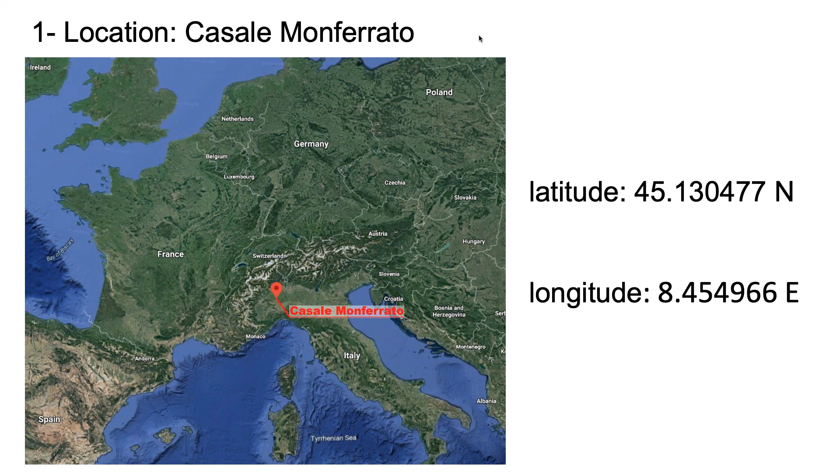Let's start with some information regarding the location of this artifact. The building is located in a region in the north of Italy, more precisely in Piedmont. This area is located between Milan and Turin, two of the main Italian industrial poles since the first decades of the 20th century. This region was a very important area for Italian economic development, as many important industries developed in this zone.

The structure belongs to the municipality of Casale Monferrato. More precisely, it is located in its industrial area, on the south of the city, near the railway station, as you can see from the area zoom.

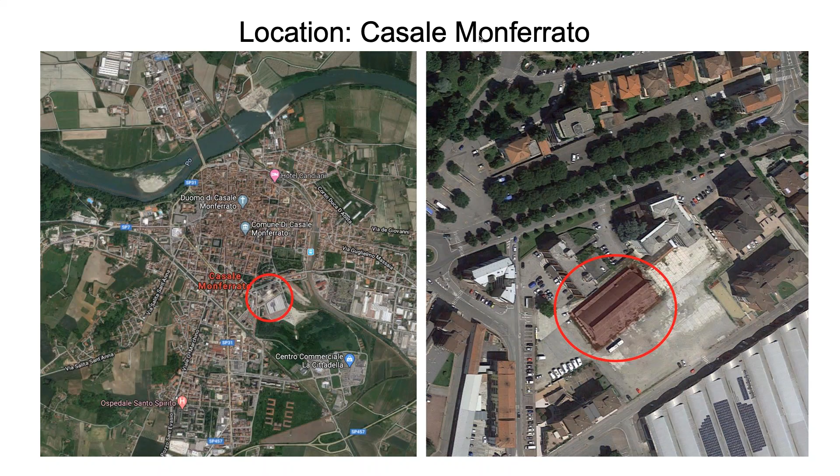The structure is commonly called the paraboloid. It was built at the beginning of the 20s by the Italcementi company of Bergamo as a warehouse storage for industrial material, clinker. It is located in the southern part of the city of Casale.

After the end of Italcementi's activity, during the following years, most of the structures were demolished, with the exception of the paraboloid, which was used as a timber warehouse from the 50s onwards. It's unclear if the central pillar and internal beam were added in this period, or if the chains were pre-existing. Their purpose was to counteract the internal thrust of the arc and act as a support base for a raised storage level added to the structure.

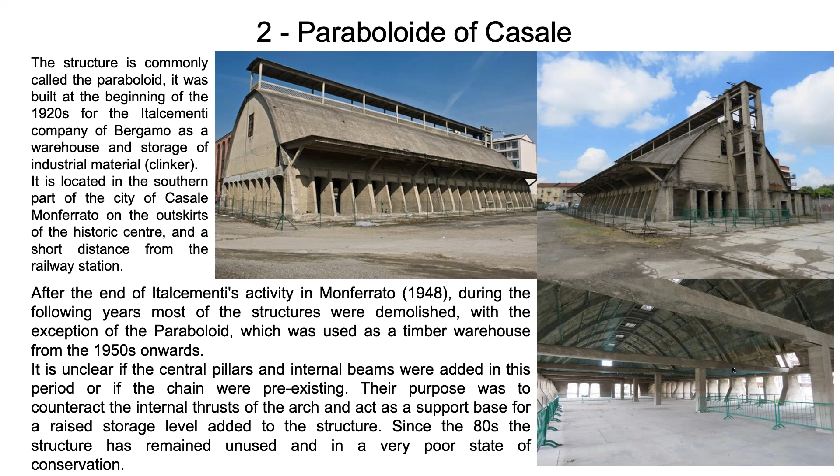Since the 80s, the structure has remained out of use and in a very poor state of conservation. The paraboloid is considered a reference icon of the industrial past of Casale, being in fact one of the first buildings in reinforced concrete made with this particular shape.

On the side, there are some scans. These two scans are the only technical documents we have found about the paraboloid of Casale. They were recovered from the book Reinforced Concrete in Civil and Industrial Building by Luigi Santarella.

Being a structure of historical and artistic interest protected by the Cultural Heritage and Landscape Code, in the last decade it has been the object of analysis aimed at the architectural conservation of the asset and the requalification of the neighborhood.

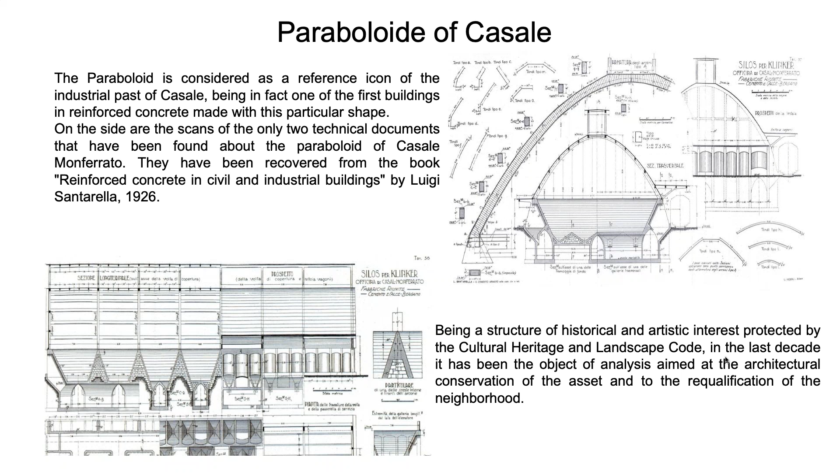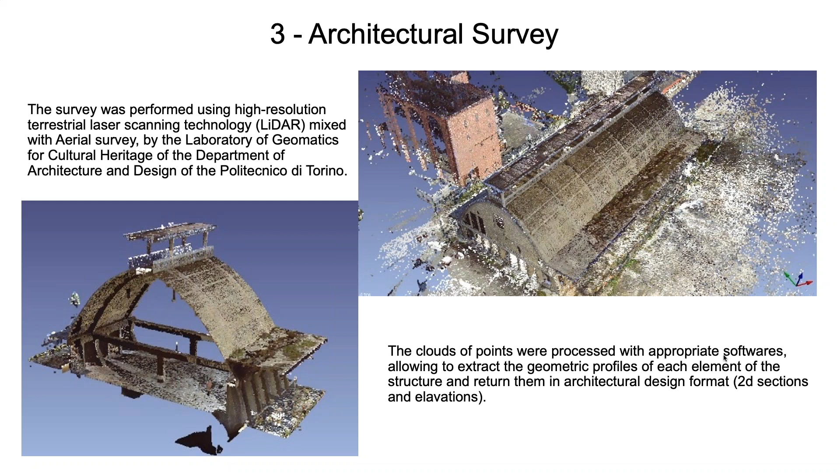The survey was performed using high-resolution terrestrial laser scanning technology, LIDAR, mixed with aerial survey, by the Laboratory of Geomatics for Cultural Heritage of the Department of Architecture and Design of the Politecnico di Torino. The cloud of points was processed with appropriate software, allowing extraction of the geometric profile of each element of the structure and returning them in architectural design format, 2D, section, and elevation.

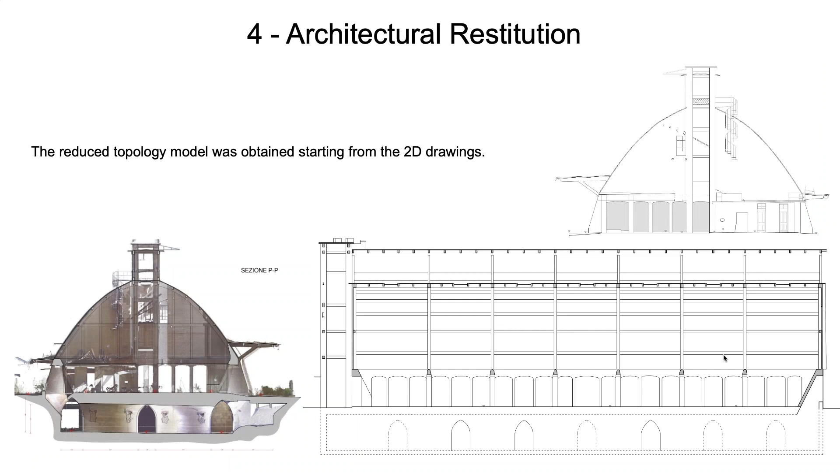Here you can see some of these 2D drawings. We have used these drawings to extract the coordinates used in the Diana model.

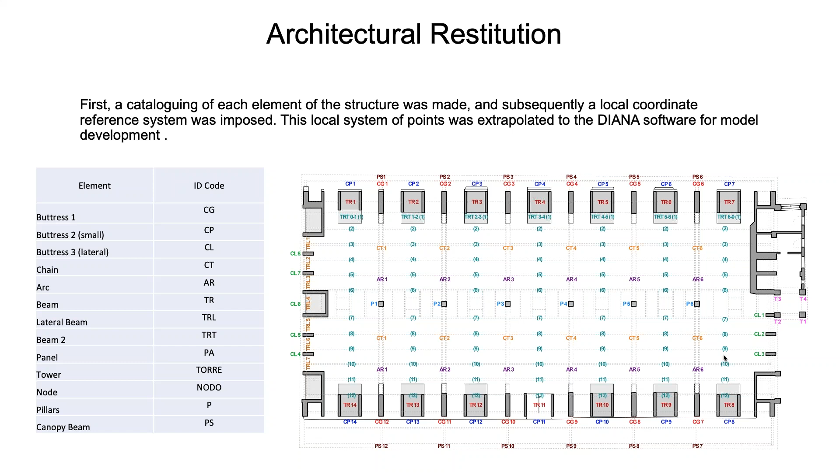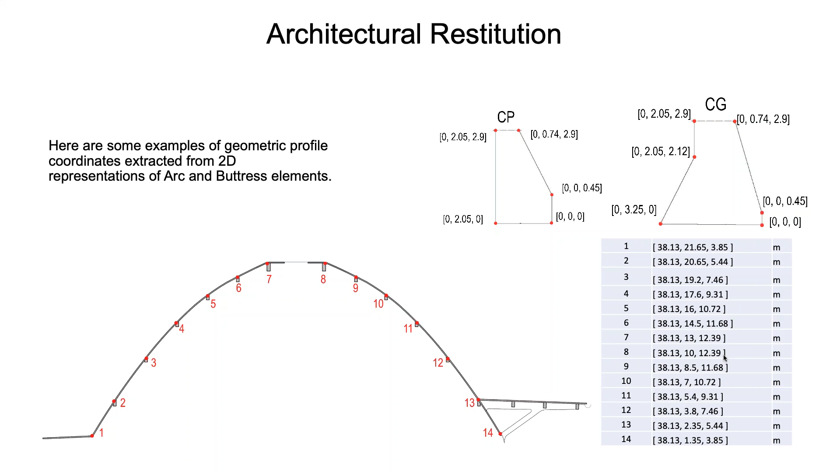So now we'll start the first video. I will show you some of the main topics for modeling the paraboloid.

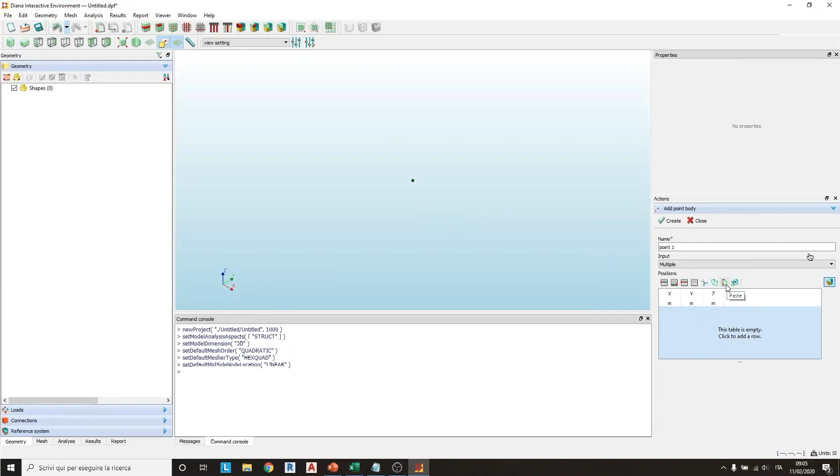Let's start by creating a new project file and setting the default mesh order to quadratic. The arc coordinates extracted from the model are entered using the add point command and selecting multiple input options. The input can be easily done by using the copy and paste command from an Excel file, as you can see in the video.

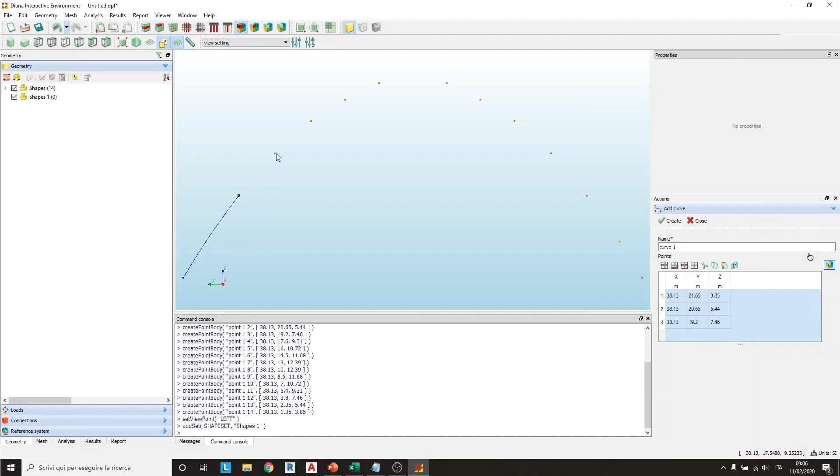Then we have defined two curves passing through the imported points with the add curve command. These two curves will represent our parabolic arc. For the top part of the structure, we have used the line command between the endpoints of the two curves.

After having defined the basic geometry of the arc, it was extruded in the X direction to create the cover vault.

After that, the initially imported construction points can be deleted because they will no longer be used in the model. Due to the large number of elements inserted in the model, the shape set which contains them has been renamed with the code of the corresponding element.

To be sure that the beam element representing the arc actually lies on the vault, the select geometry edge function has been used to select the outer line of the vault. Then the line constituting the arc has been obtained using the extract command.

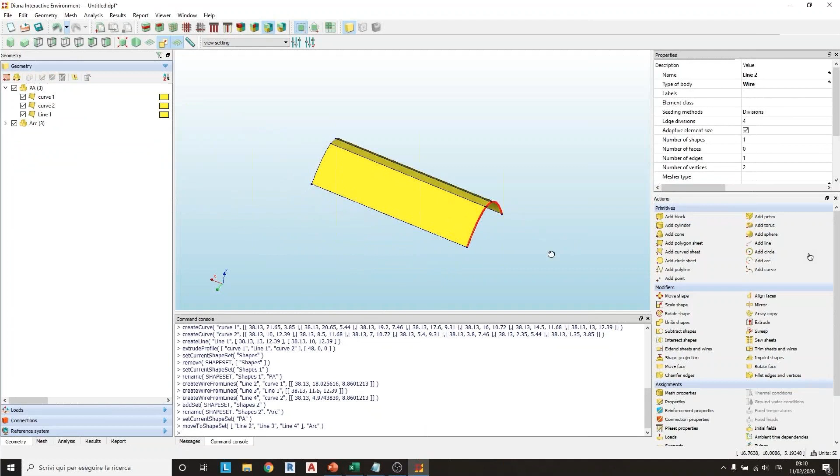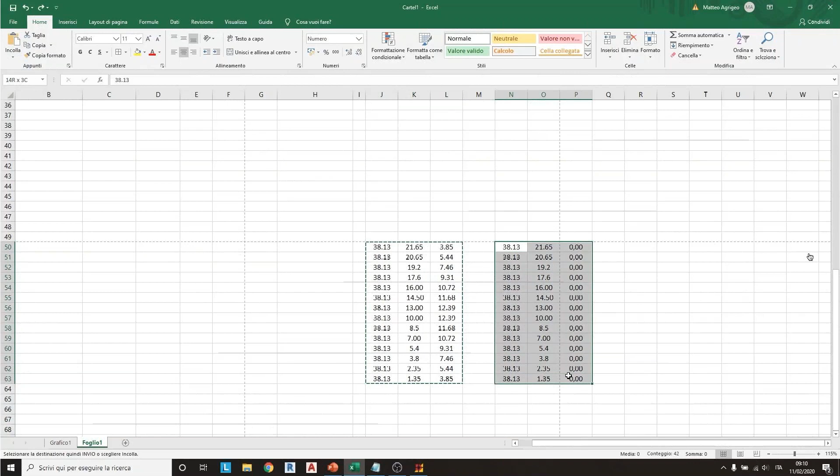We now proceed to insert the second warp beams of the vault. Then we import the coordinates of the beam obtained from the architectural plan of the model, using the same procedure seen before for the construction points of the arc. After having imported them, the points have been extruded in the X direction in order to create the line representing the joints.

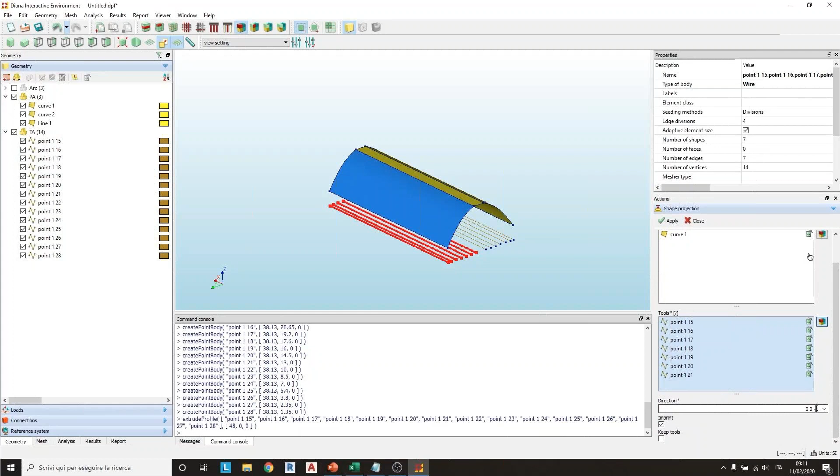Then the shape projection command in the positive vertical direction was used, unchecking the tick on imprint. This command allows us to project the line representing the joint exactly onto the vault surface. Be sure that the direction is vertical positive.

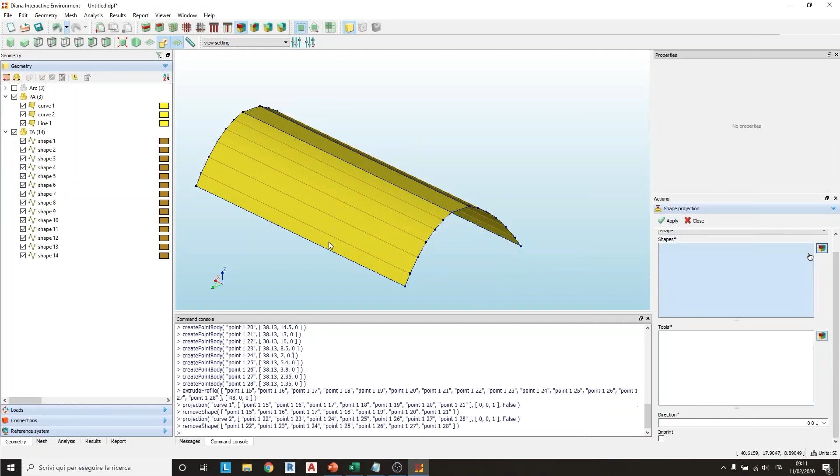Then we proceed to positioning the main arches along the vault with the array copy command.

Once all of this has been done, to complete the simplified construction of the paraboloid cover, we need to insert the closing wall of the vault in the east-west direction.

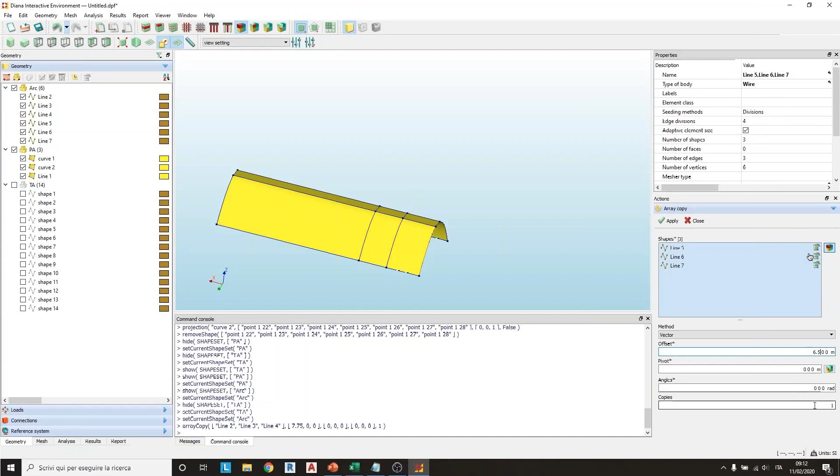Here you can see all the numerical input of the array copy command. So now let's add a polygon sheet using the right command.

We have selected the rectangle method, positioned at the base of the arch with YZ reference plane and with dimensions such as to cover the entire opening of the vault.

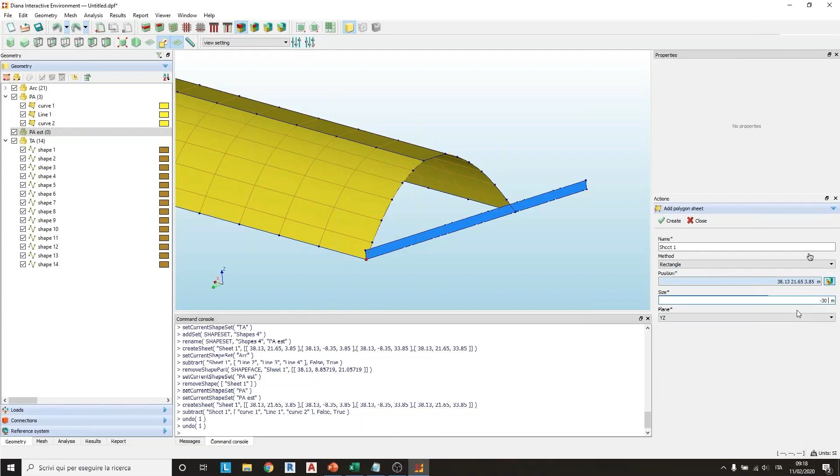Subsequently, using the subtract shape command, we will subtract the three surfaces that represent the vault of the paraboloid from the newly created surface, and then we eliminate the excess part using the face selection function.

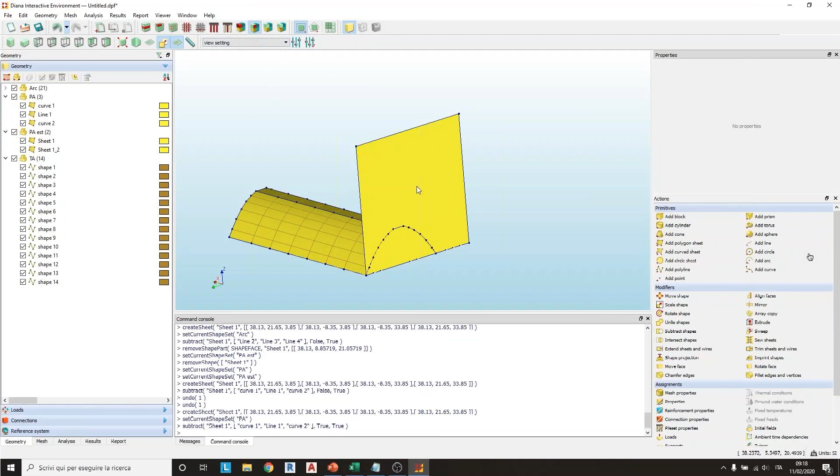Now we have the main part of the vault modeled. We will insert the pillar that supports it.

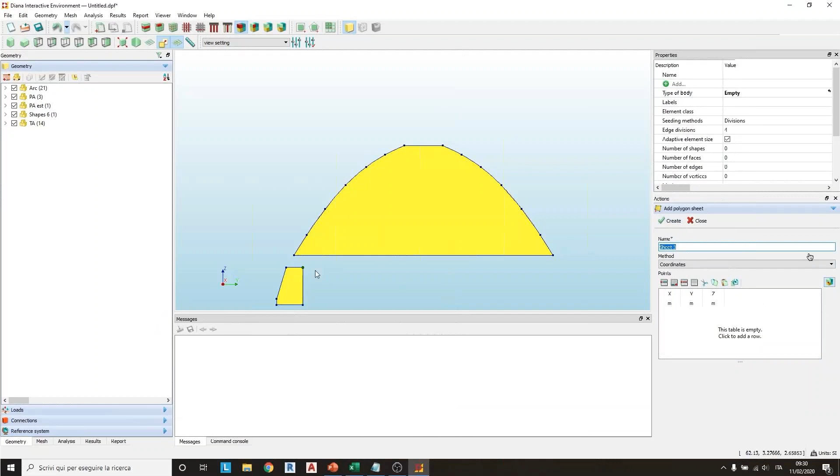The pillar will be created with the add polygon command using the coordinate method. So let's take the coordinates for the pillar from the Excel file and paste them into Diana.

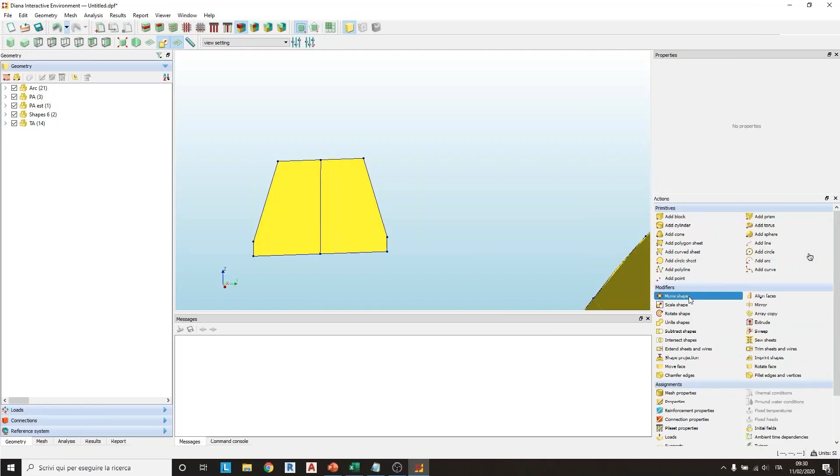After its creation, we select the pillar with the mirror command, and after assigning the axis on the base of the pillar along a Y direction, we get the two supporting pillars of each arc.

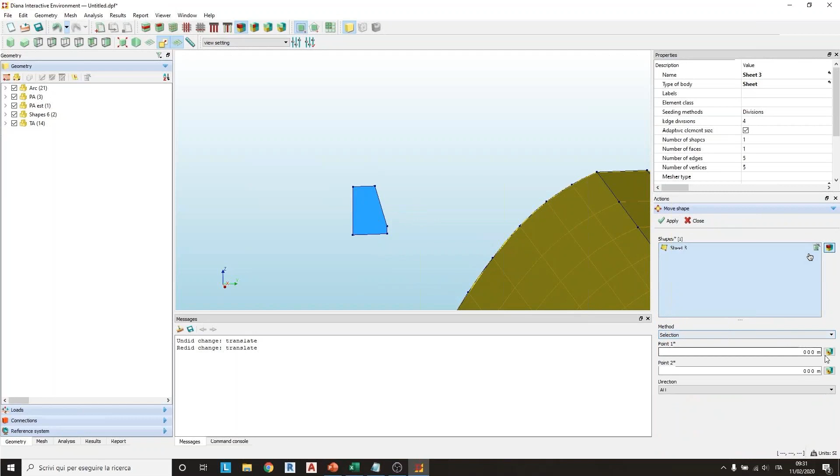Then, using the move shape command, we will place the pillar in the support point of the arc. After positioning the first pair of pillars, we can use the copy array command to complete the positioning of the other pillars and the insertion of the closing wall on the east side of the paraboloid.

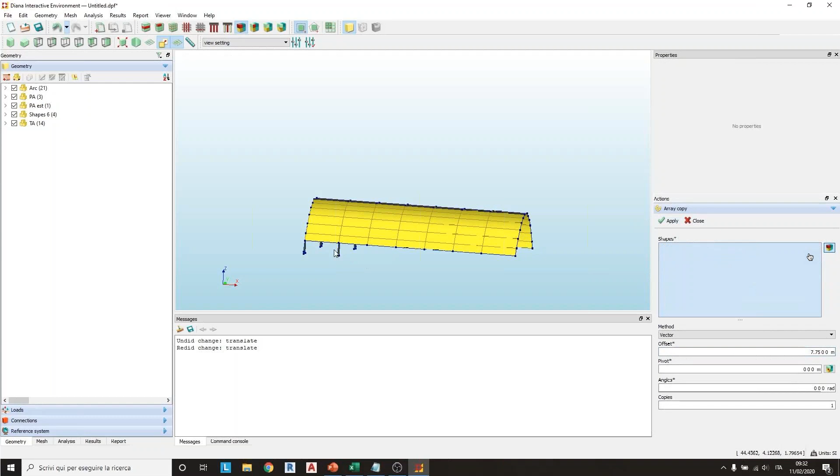The remaining part of the structure has been modeled using the same commands previously shown, and using the coordinates extracted from the table as the basis for their positioning.

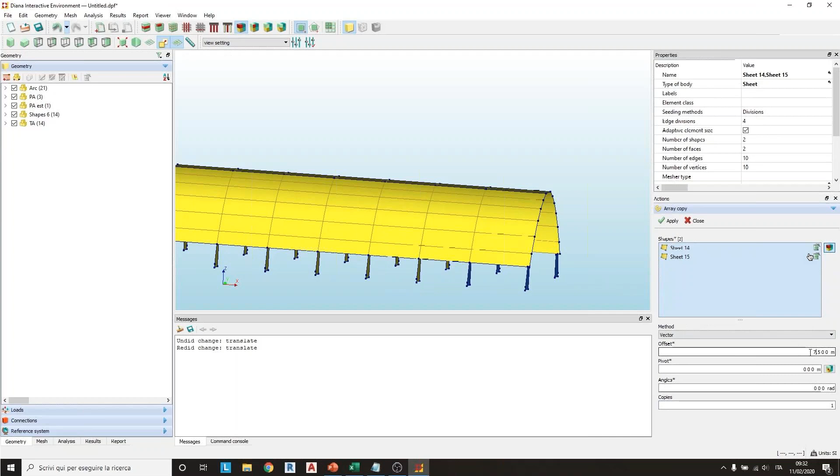The construction of the model was a very long process that, for time constraints, I cannot show you entirely today. Here you can see the result of the elements modeled.

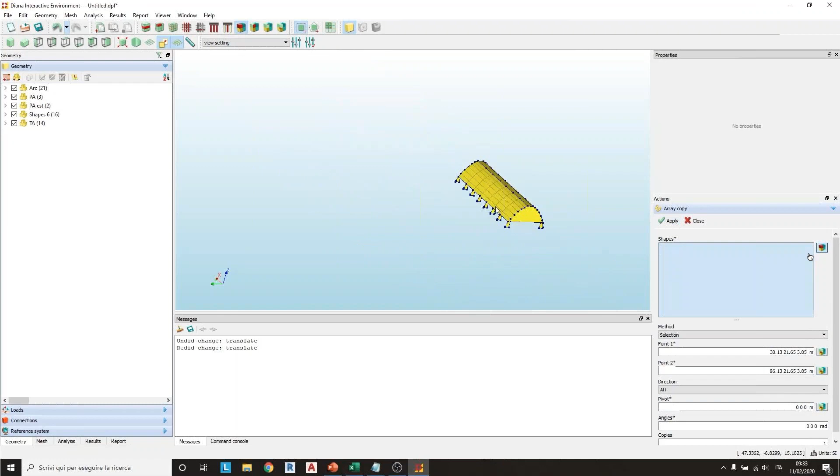Another fundamental step for the calibration of the model is the assessment of the mechanical properties of the existing building. The preliminary visual investigation of the site reported a general degradation of the material of the structure and extensive corrosion of the reinforcement, often accompanied by the spalling of concrete.

The main cause of the structural damage is to be attributed to aging. In addition, the poor condition of the roof sealing, and the lack of maintenance of the building, has involved an infiltration of rainwater, which is extremely harmful with respect to reinforcement corrosion.

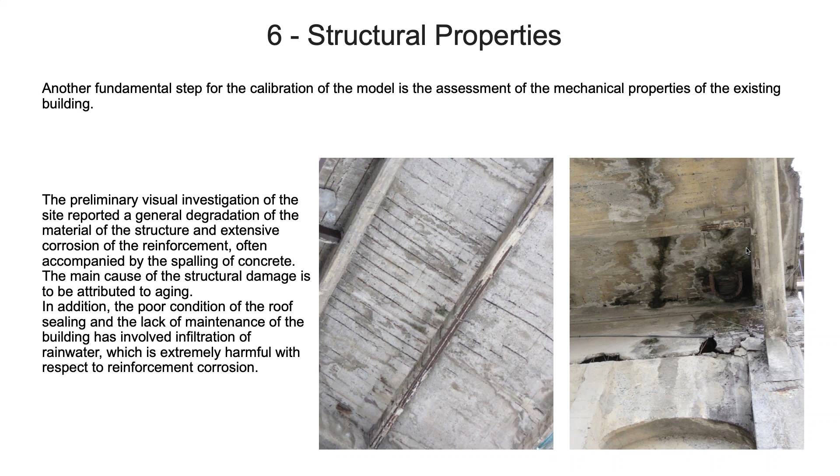Given the poor state of conservation of the structure, a series of diagnostic tests were carried out on the main structural elements in order to assess the mechanical properties of the various elements of the building. The tests carried out were coring, pull-out, ultrasonic, and pachymetric tests.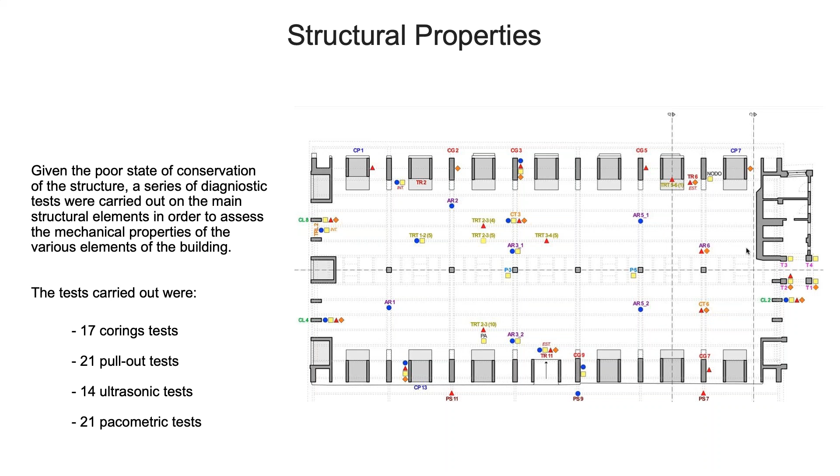The coring test consists of the extraction of a specimen from the structural element, which will then be subjected to mechanical tests in order to investigate the properties of the element from which it has been extracted. They have been extracted on the main structural elements in order to have a picture uniformly distributed and representative of the entire structure. The resulting quality of the concrete was pretty inhomogeneous.

You can see here a chemical test to assess the concrete carbonation depth.

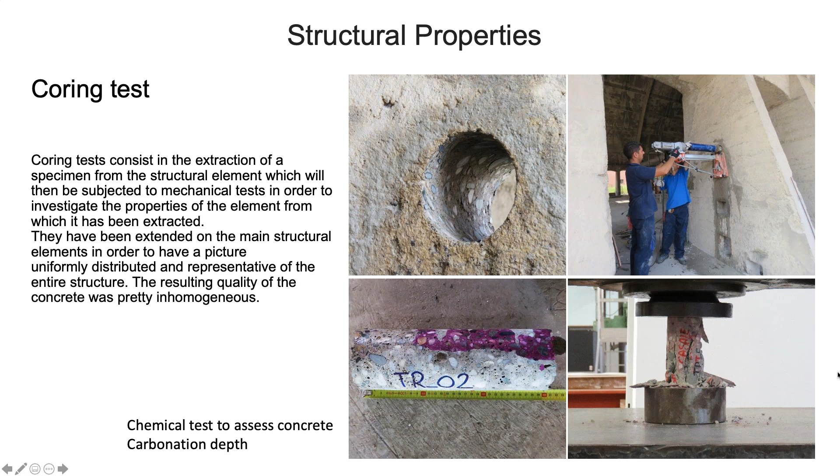Okay, now let's talk about the pull-out test. This type of test consists of extracting from the concrete surface a steel insert of standard dimension by means of an extractor unit resting on the surface of the structural element.

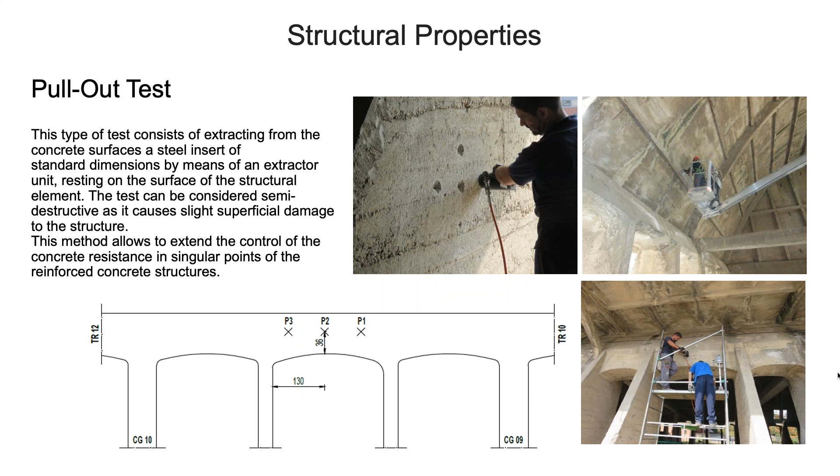The test can be considered semi-destructive, as it causes slight superficial damage to the structure. This method allows us to extend the control of the concrete resistance to singular points of the reinforced concrete structure.

Ultrasonic test: the theoretical principle of this method is based on the propagation of longitudinal elastic waves in a medium, considering that the speed of propagation in a homogeneous medium is a function of its physical properties.

It is therefore possible to correlate the speed of propagation to the elasticity of the concrete. On the basis of the speed obtained, an estimate of the elastic modulus of each element investigated has been obtained.

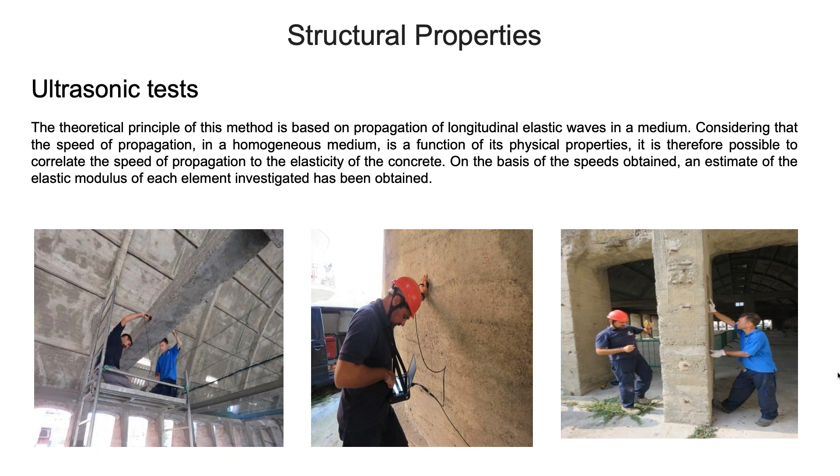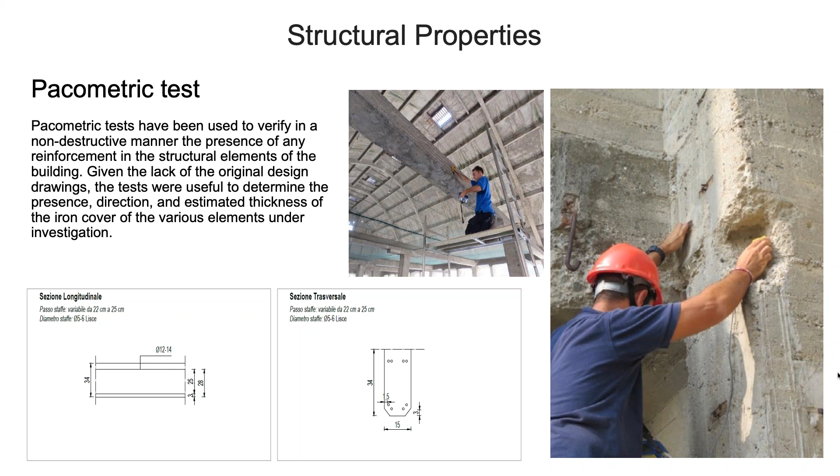The pacometric tests have been used to verify in a non-destructive manner the presence of any reinforcement in the structural elements of the building. Given the lack of original design drawings, the tests were useful to determine the presence, direction and estimate the thickness of the iron cover of the various elements under investigation.

The processing of the data obtained from the mechanical tests provided the mechanical properties to be assigned to the elements, accounting for the current degradation condition.

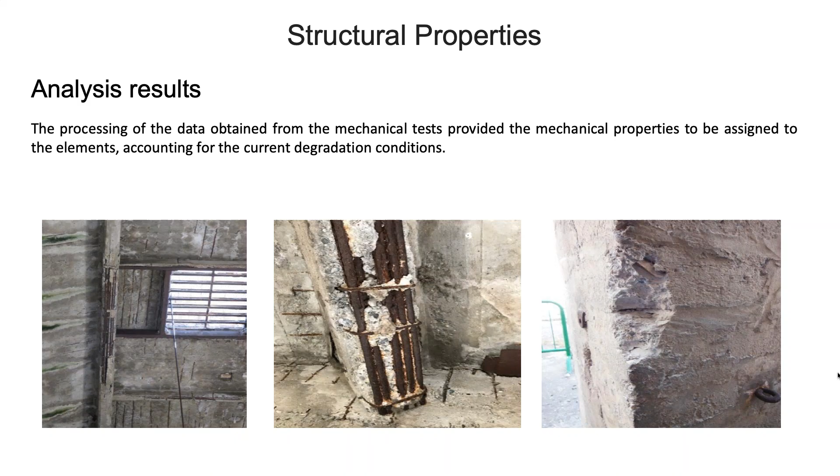Now I will show you another small video where we apply the mechanical properties to the Diana model.

Let's start with the support. The support will be placed on the ground support line of the pillars. So we add a new set of supports, and the target type in this case will be edge.

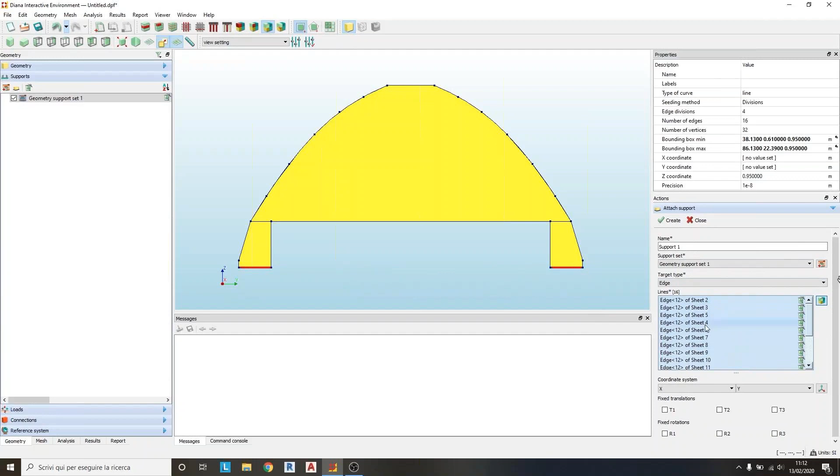We select the line that we want to bind, and we block all the translation and rotation. After attaching the support, we can see that the constraints are displayed at the ground support of the pillar. The visualization can be activated and deactivated by checking the appropriate box.

After defining the constraint of the structure, we will now create the material of the elements that compose it. As a class for the material, concrete and masonry has been used, and as a material model, the Maekawa-Fukuura model has been selected. This type of material requires mass density, tensile strength, and uniaxial compressive strength data as input. The values used are those obtained from the mechanical test shown before.

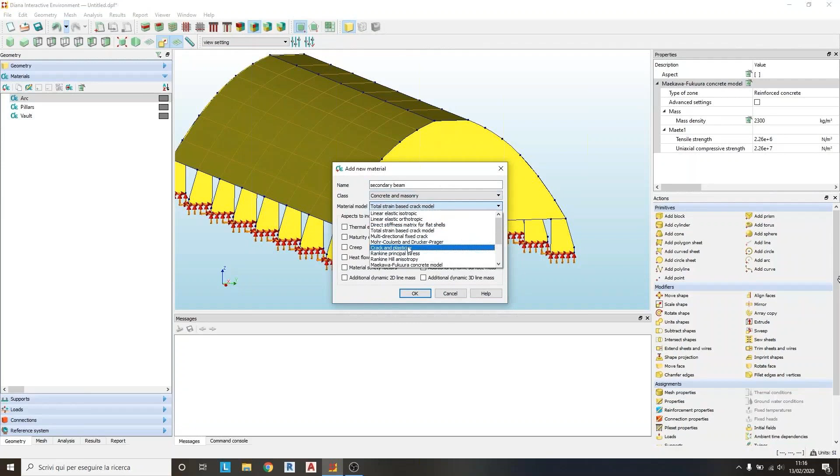Therefore, we proceed by creating materials that serve for the definition of the model elements. Let's create the second material used for the pillar. We have used a different number for each element. Here the material used for the secondary beam.

After having created them, we proceed to assign the properties to the elements using the property assignment command. For the line element, we select the element class: Class-III Beams 3D. As material, the previously created material is assigned, which corresponds to the element, and as geometry, we define the property of the geometry of the element according to what was obtained from the 2D drawings.

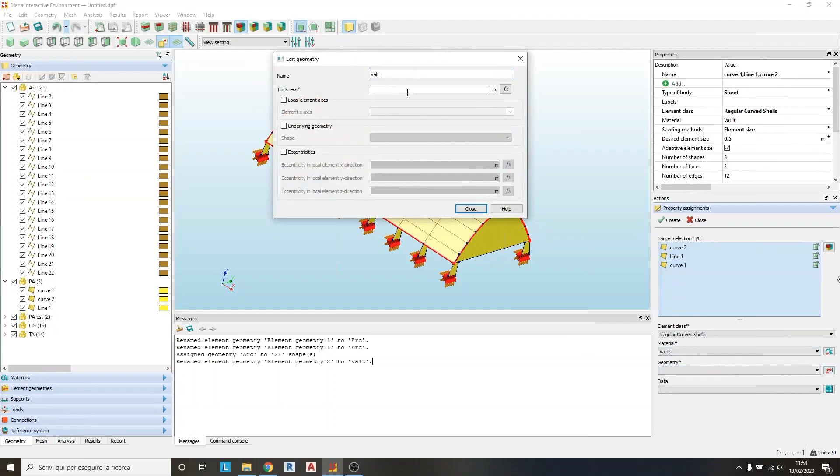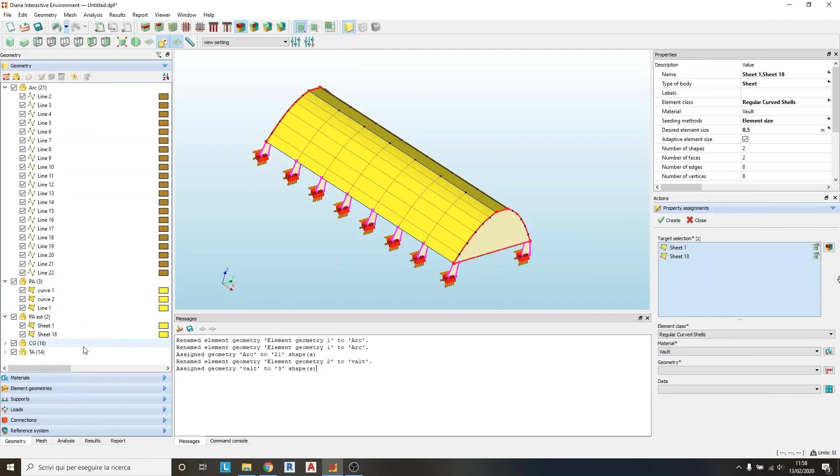We now move on to the assignment of the properties of the vault. In this case, as a class, we use regular curved shell, and after assigning the material, we create the geometry. Also for this element, after setting the thickness, we assign an eccentricity, because we want the vault to be in line with the upper part of the arc. This step is crucial in order to respect the correct geometry arrangement of the real structure. So let's proceed by repeating the same step for all the elements of the structure.

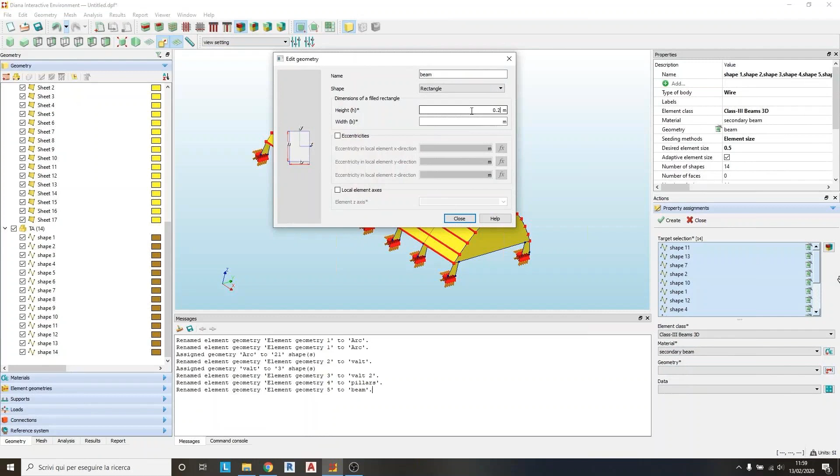For beam type elements, we input height and width parameters. The next step consists of the assignment of the load to the structure. We go to the load tab and use the command define global load to create the self-weight load. We create the load case and select the load type.

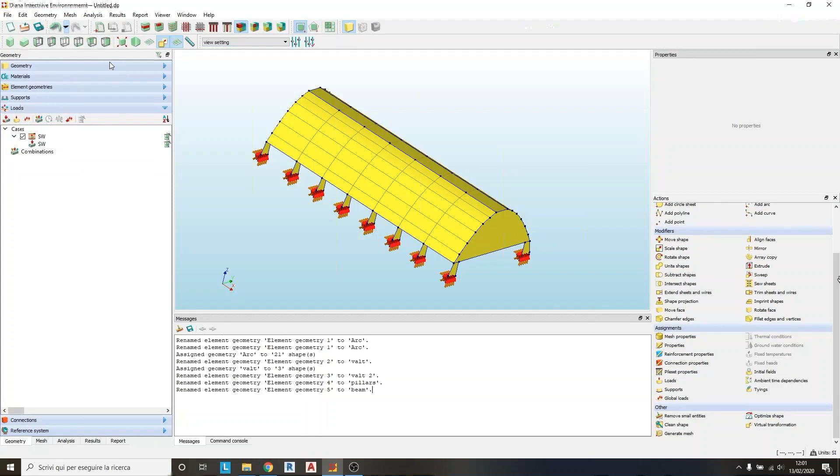Finally, the last part we still have to define is the reinforcement. For their creation, we will duplicate the lines that represent the beam element, moving them along the z-axis to represent the upper and lower warp of the iron in the element. This step is then repeated for all the beam elements, which will then be collected in a single shape set.

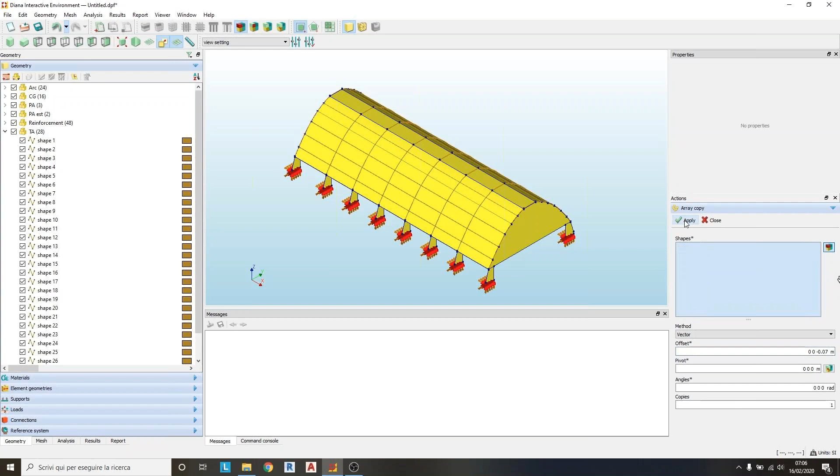Now we duplicate the secondary order beam for the reinforcement creation, and we move them into the right shape set.

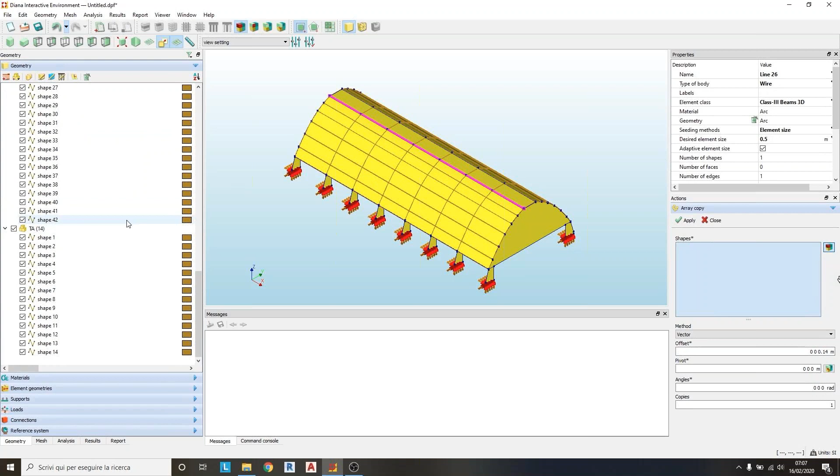To assign the right characteristics to this line element, we use the reinforcement properties command. We select all the elements in the set and create the new material to assign. The class in this case will be reinforcement, and as a material model, von Mises plasticity has been used. We then proceed by entering the data required by the material and move on to the geometric properties of the reinforcement by entering the total cross-section area of the bar.

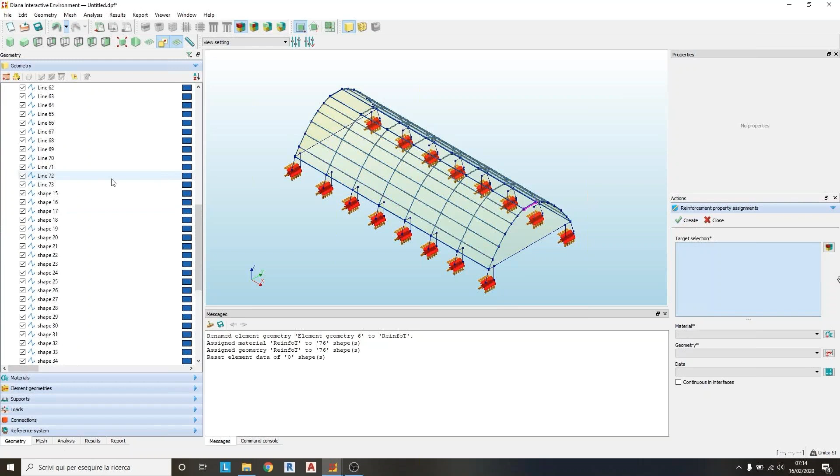As far as the vault is concerned, a reinforcement grid has been assigned by duplicating the representative element of the vault and assigning them the reinforcement properties. Then we define the material as it has been done for the iron beam element. As geometry, in this case, we are asked to enter the bar diameter and spacing between bars in the X and Y directions.

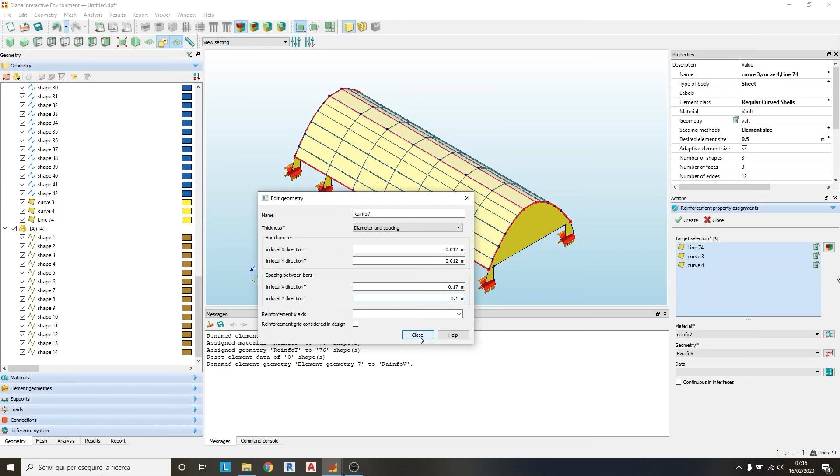Here we use the data collected from the pacometric test for the spacing between bars. We then verify in the model display that the reinforcement elements have been correctly inserted. They are represented in blue color.

The last thing we have to define are the mesh generation properties. So let's select the whole structure and open the mesh properties panel. We verify that the target is on shape and the seeding method is on element size. We assign the desired mesh size and apply the properties.

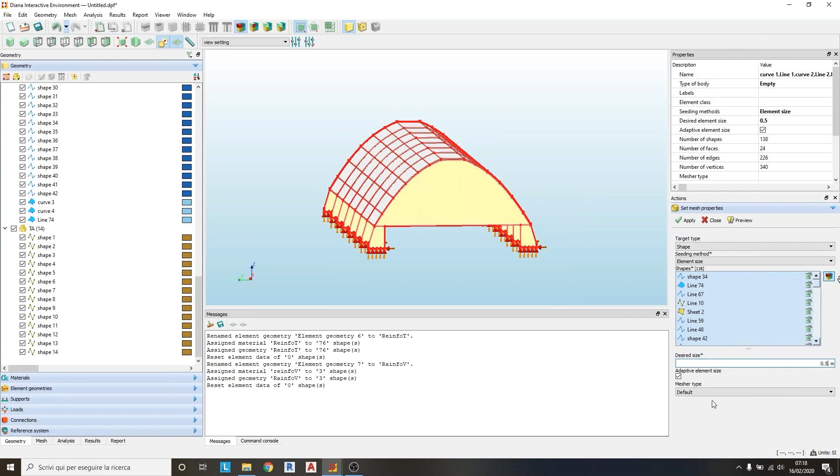Now we can generate the mesh model using the generate mesh command. Here you can see some screenshots of the complete model that we have used for the Diana calculation. The screenshots are taken using the 3D preview of the mesh selection in Diana.

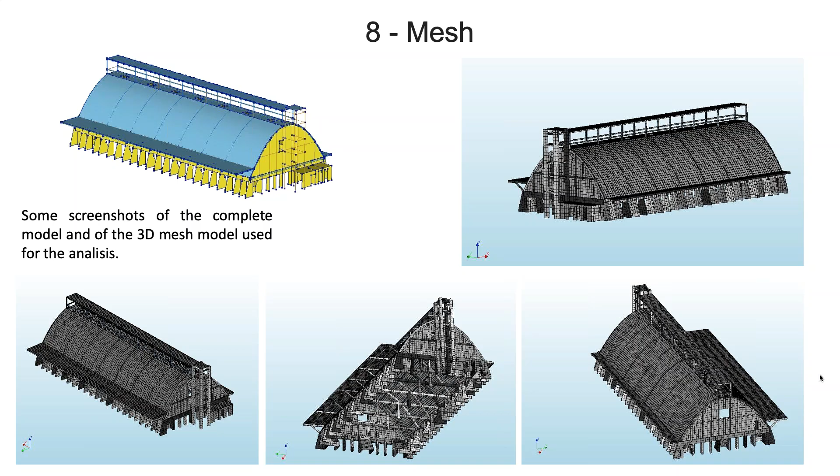The following analyses were performed on the model: structural linear static, structural eigenvalue, structural direct response, response spectrum, and structural nonlinear.

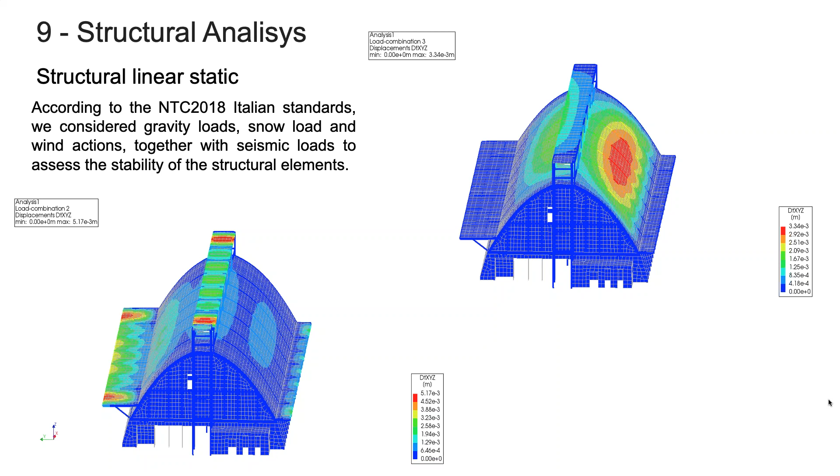According to the Italian standard, we considered gravity load, snow load, and wind action for the structural linear static analysis, together with the seismic load to assess the stability of the structural elements. Here you can see some screens of the combination between wind and snow.

According to the nodal displacement resultant contour plot, we can observe that the upper and the lateral canopy are generally in critical condition.

We have plotted, using Diana, representative diagrams of moment and compression stresses in arched beams of the paraboloid. Note the bending moment discontinuity in correspondence with the connection with the upper and lateral canopies.

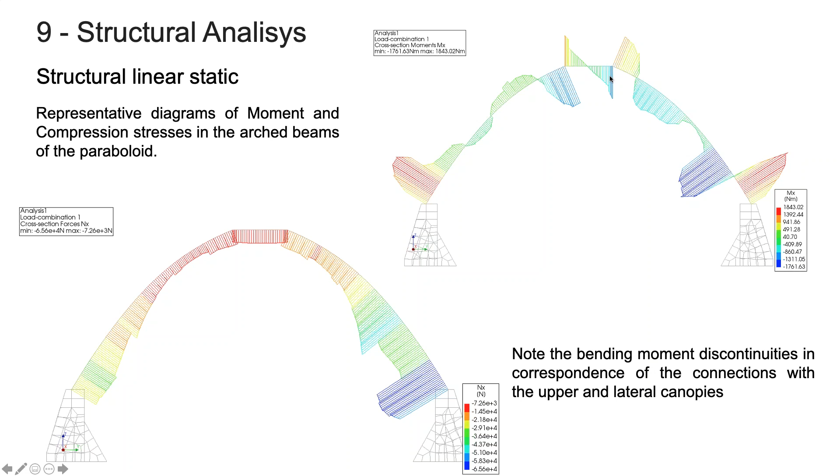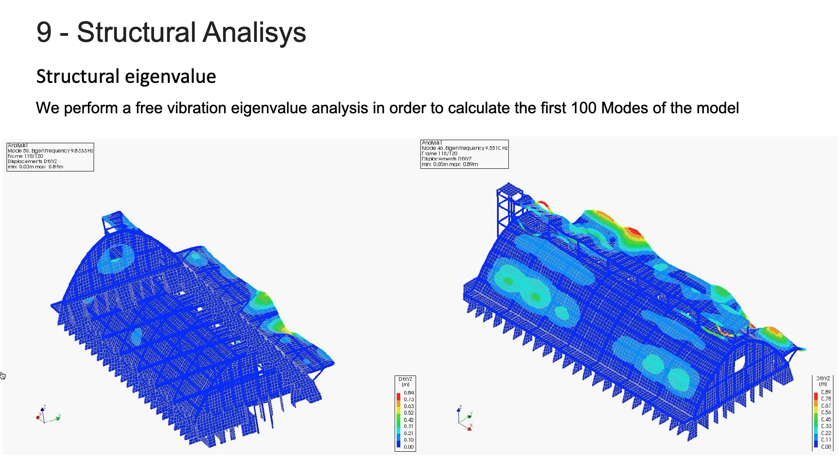We have performed an eigenvalue analysis, a free vibration analysis in order to calculate the first 100 modes of the model. Here you can see two little clips created using the Diana corresponding function.

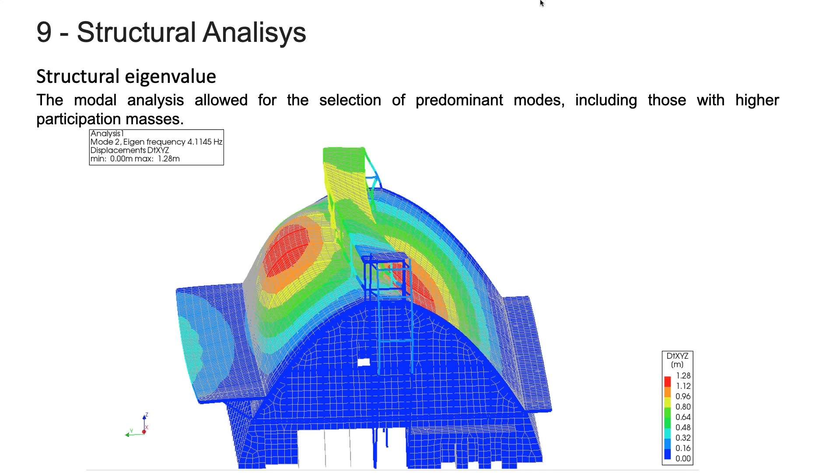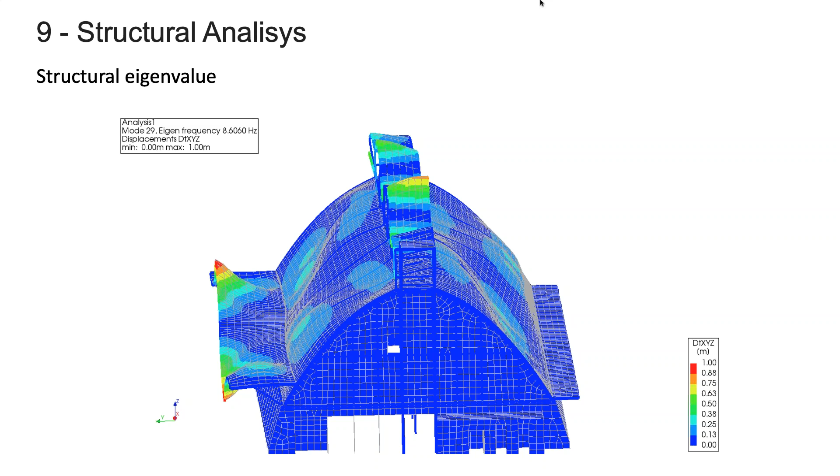The modal analysis allowed for the selection of predominant modes, including those with higher participation masses. Here you can see mode 2, mode 5 with predominant vertical action, and mode 29, which has action in all the structure's local axes.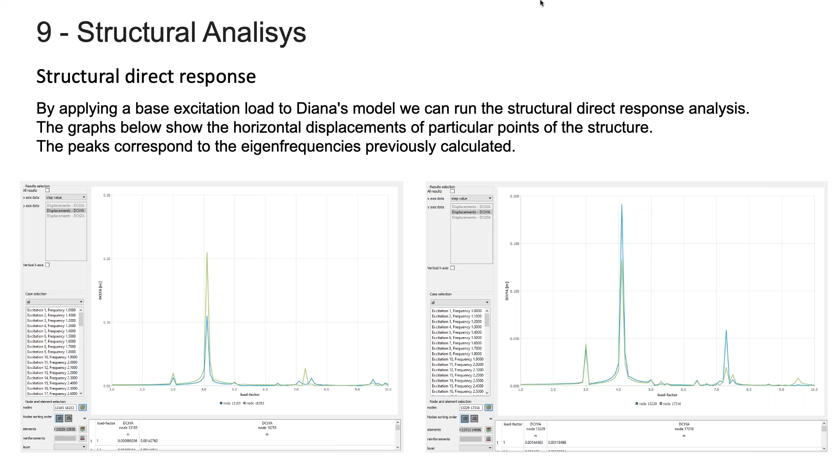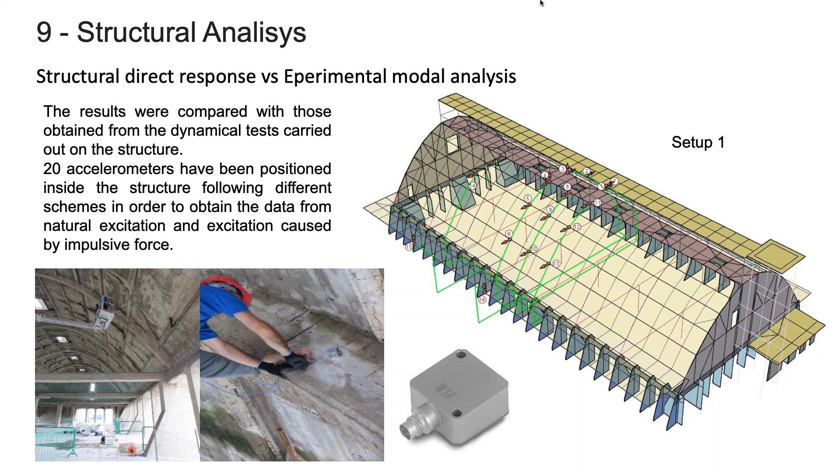The results were compared with those obtained from the dynamical test carried out on the structure. 20 accelerometers have been positioned inside the structure, following different schemes, in order to obtain data from natural excitation and excitation caused by impulsive force. Here you can see the first setup of accelerometer use.

Using an SSI algorithm, dynamic identification of the structure in terms of frequency, shape, and modal damping was performed in the time domain, using directly collected data. The comparison between the results obtained from the acquisition on the structure and those obtained from the model made it possible to verify its actual calibration.

Here you can see some graphs of the modal shape, frequency, and damping identified for the model before and after the calibration.

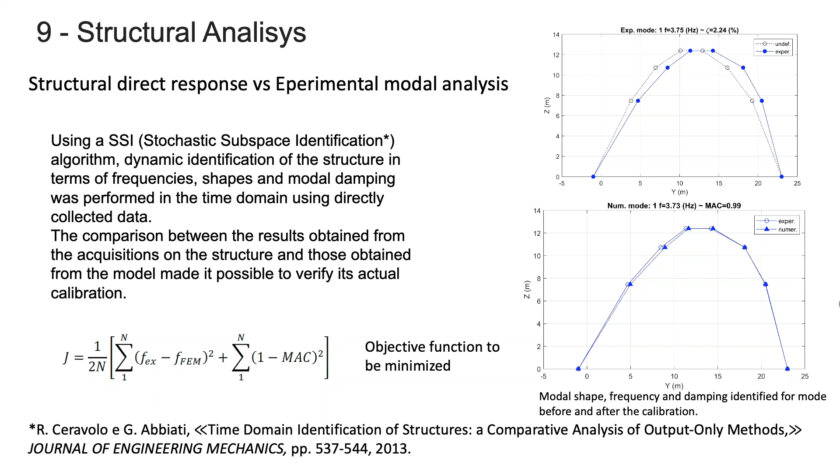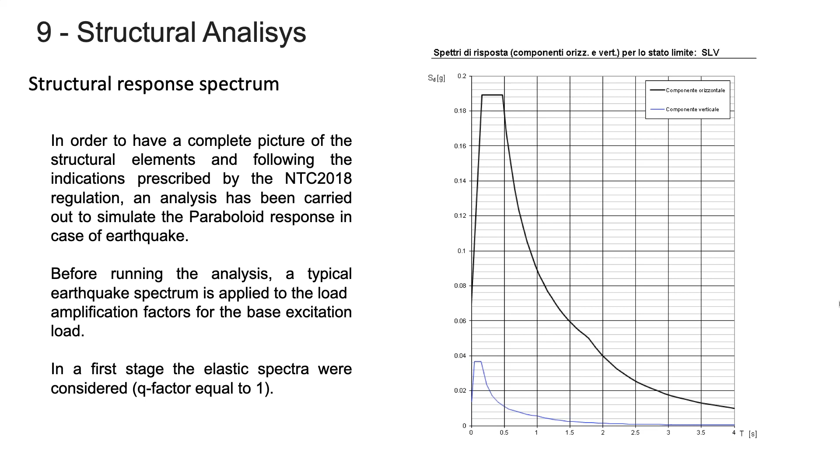In order to have a complete picture of the structural element, and following the indications prescribed by the NTC 2018 regulation, an analysis has been carried out to simulate the paraboloid's response in case of earthquake. Before running the analysis, a typical earthquake spectrum is applied as the load amplification factor for the base excitation load. In the first stage, the elastic spectra were considered, with Q factor equal to 1.

The analysis has highlighted a vulnerability of the structure concerning seismic action. In fact, the shell structure involves a multitude of vibration modes, some of which are significantly amplified by the earthquake spectrum.

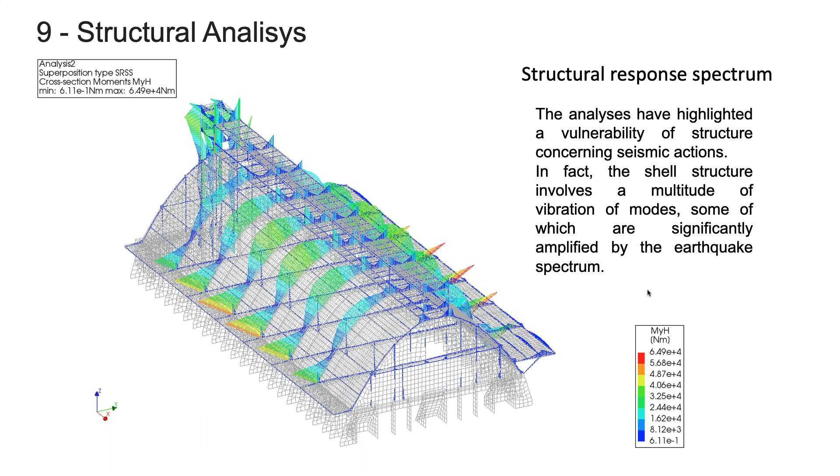The structural design checks were carried out combining the effect of seismic action in different directions with the static effect at the ultimate limit state condition. Appropriate reinforcement section and strength are considered to account for carbonation and corrosion.

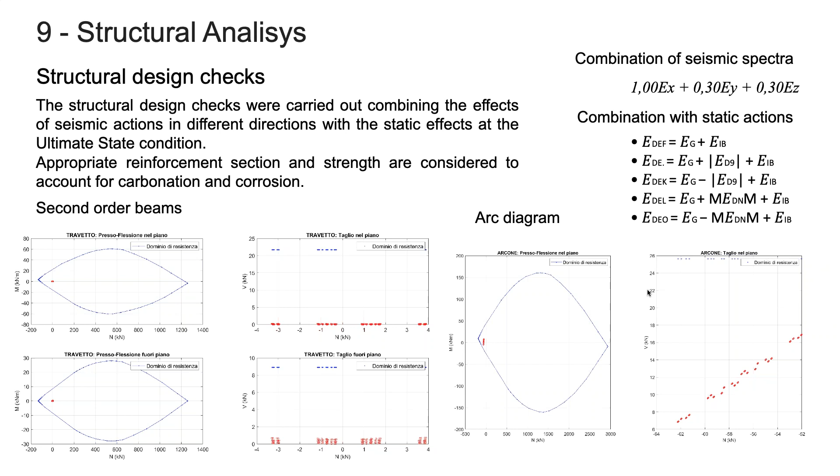The internal chains are among the most critical structural elements. The collapse will take place due to shear. The chain collapse or removal promotes the shear collapse of the buttresses.

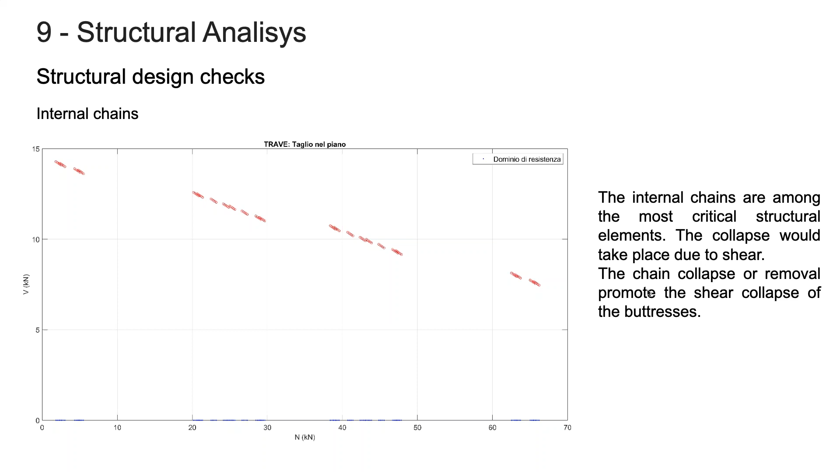Finally, in order to obtain an accurate and realistic prediction of the structural seismic response, it is necessary to have an analysis tool to capture nonlinear behavior and its evolution over time. To perform this type of analysis, a pushover load must be applied to the calculation model. The pushover will be increased incrementally with a series of load steps.

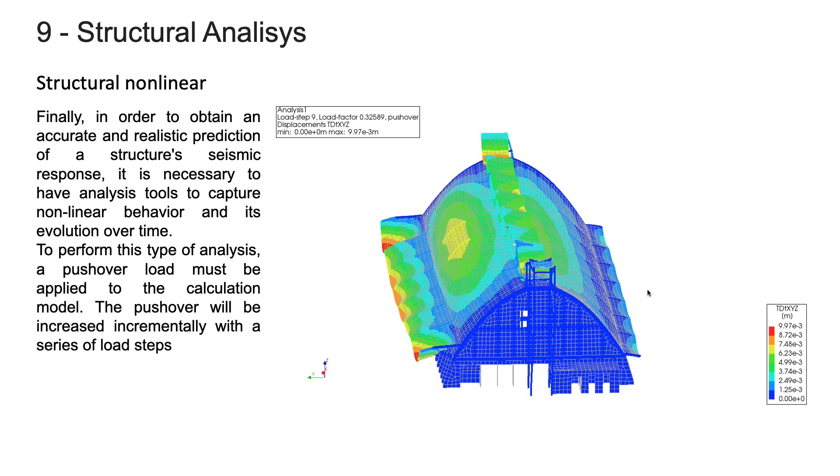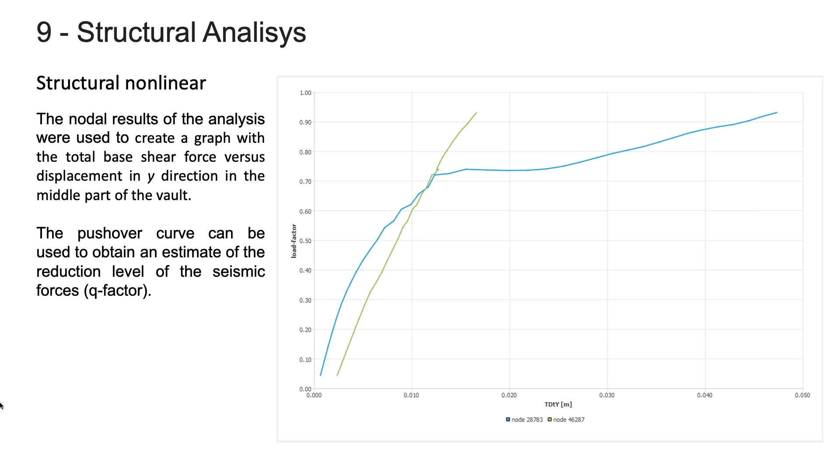The nodal results of the analysis were used to create a graph with the total base shear force versus displacement in the y direction in the middle part of the vault. The pushover curve can be used to obtain an estimate of the reduction level of the seismic forces.

The numerical simulation shows that the level of safety among the different structural elements is quite variable. The most critical elements are the internal chains, followed by the buttresses and the longitudinal beam at the top of the buttresses. In addition, the failure mechanism of such elements is due to reaching the limit shear capacity therefore a brittle mechanism. The secondary longitudinal beams and the vault shell are in quite poor condition due to the extensive carbonation of the concrete and the corrosion of the limited amount of present reinforcement.

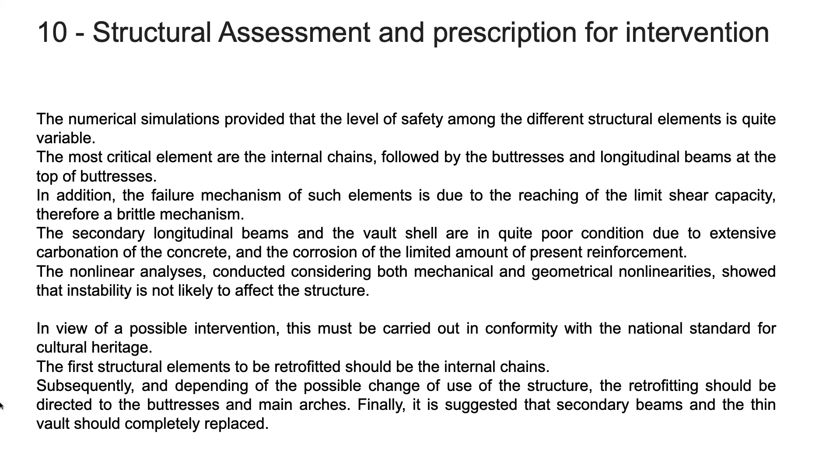The nonlinear analysis, conducted considering both mechanical and geometrical nonlinearities, showed that instability is not likely to affect the structure. In view of a possible intervention, this must be carried out in conformity with the national standard for cultural heritage. The first structural elements to be retrofitted should be the internal chains. Subsequently, and depending on the possible change of use of the structure, the retrofitting should be directed to the buttresses and main arches. Finally, it is suggested that the secondary beams and the thin vault should be completely replaced.